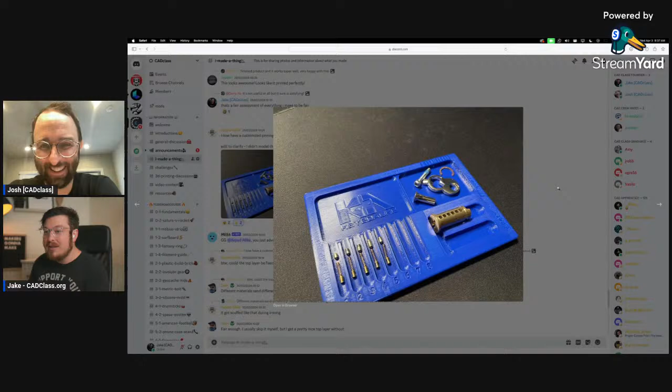But one thing I want to talk about is keyed alike. What you were saying a bit later is, can I fix the top layer with some fine sandpaper? That started a bit of discussion I want to expand on - yes, technically you can sand any 3D print, it's obviously soft plastic, but should you?

There's one thought that if you sand it, it becomes smooth - you can hide the layer lines and it becomes a nice, neat bit of plastic. But as soon as you rough up the surface, it turns very white or pale, giving a horrible contrast. Because plastic isn't very hard, it will never become perfectly smooth with sandpaper. You need to apply a harder material like Bondo, car sealant, or automotive spray paint that becomes harder than the plastic, and then you can polish it.

But I think there's a different thought, and I want to hear your opinion on this, Josh - you shouldn't sand it just to make it look pretty. You should accept the limitations and the surface quality of what you can get from 3D printing, and that just becomes an accepted quality.

Obviously as the tech gets better, quality improves slowly but surely. But as you can see in this picture, this is a really nice print - the top layer is lovely. I don't see anything wrong with this from a 3D printing perspective. Someone from woodworking or metalworking might look at it and say, oh, that's rough, you can see all the lines. I disagree. What do you think, Josh? Yay or nay on the sand?

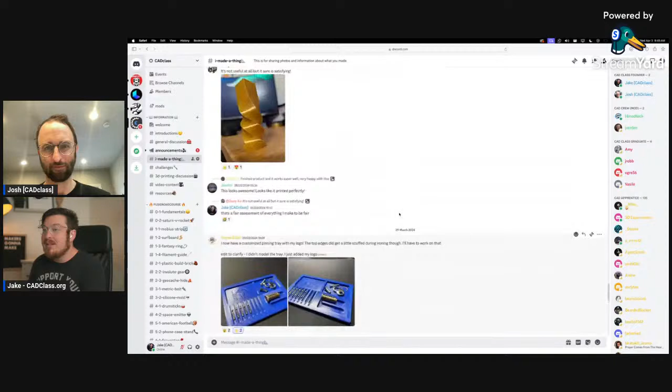Something from Eloreth - I can't remember if we went over this last week. But this is one of Joe Street's friends. He's just making a dead simple little headphone holder that snaps onto the side of their desk and just kind of holds their mouthpiece.

That's rad. One thing I will say, if we have just a little bit of criticism - I think I can see the layer lines are actually horizontal in this orientation, which means this large plate only has a tiny amount of surface area where it meets this big place. So if you're wanting to put your headphones on there and pull too hard, it's very likely you could have broken that off.

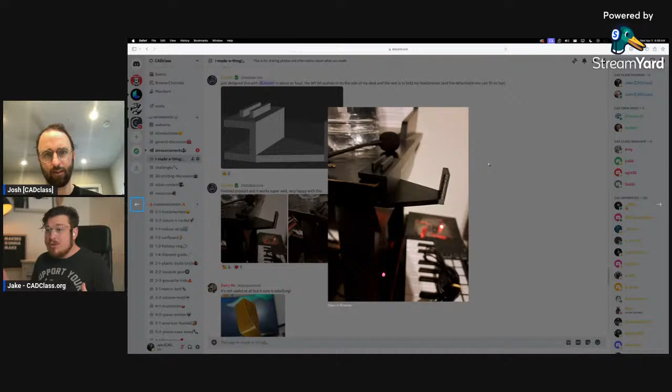So what I would actually recommend would be to print this sideways, so this angled face is actually touching the build plate and it's growing up at an angle. That means the layer line starts from this face and is connected in an L shape all the way around, making it just that little bit stronger. I imagine you won't have any of the support material you'd need for this undersection then. But that's pretty minor - rad project, love to see it.

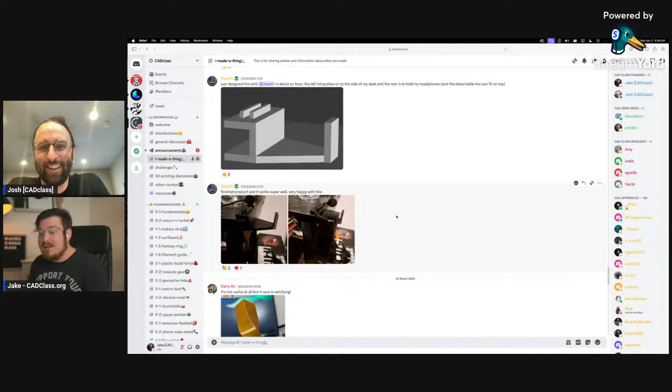Not very useful, but very satisfying. I totally agree. This is going to be one of the things I'm going to try and make today in CAD to see if I can actually make anything better.

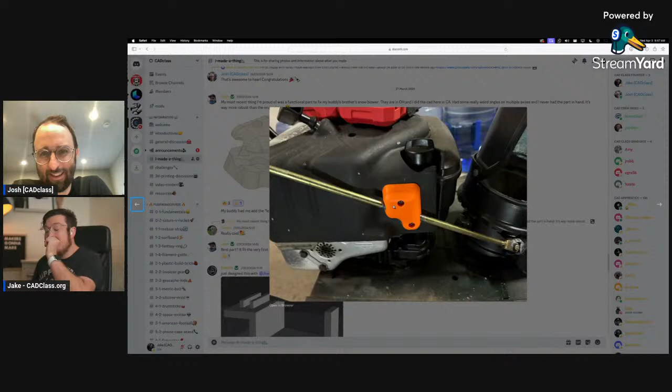And then Dom - I really liked this project. One of the most recent things I'm proud of was a functional part to fix my buddy's brother's snowblower. Had some really weird angles, and it fit the first time. So it looks like a little holder for a snowblower, and it just kind of snaps into place and screws in, and it's rad.

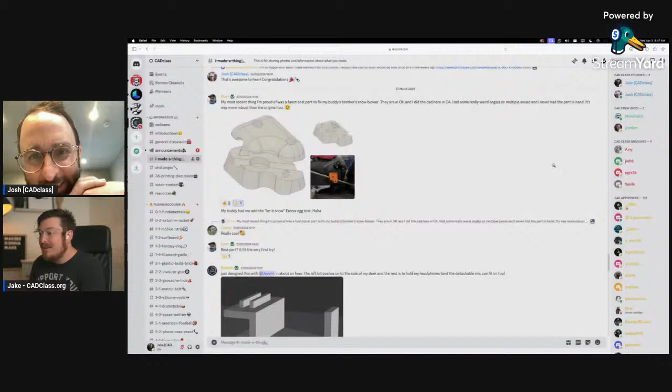I love that stuff, that's actually a fairly complex little design there. I know, that's not simple. No, and that's awesome, nice. Yeah, and it has little keys in it as well. Fantastic.

All right Josh, I want to actually get into this door handle thing because it's been bugging me for a while, and I just kind of want to get into it.

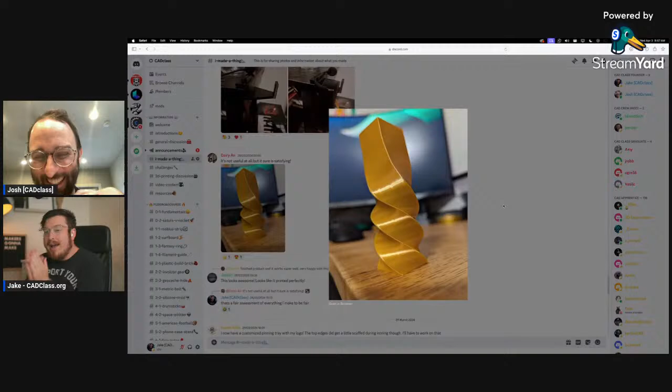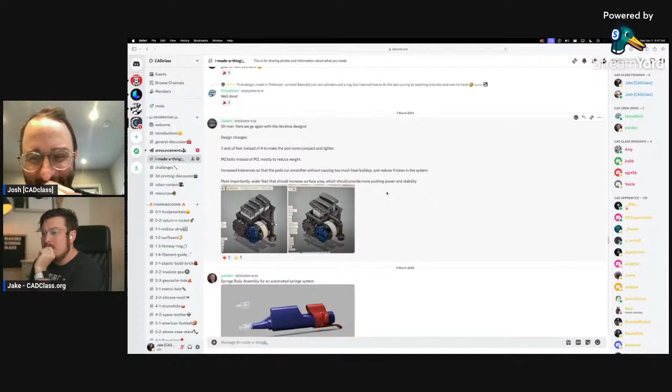Show the original photo of the door. Oh gosh, where is it? Yeah, it's up here. I actually can't remember who this was from. Was it from Dairy? It might have been. Yeah, I'm not quite sure, it was a long time ago. If we can find it... oh goodness, I don't even know if I can find it. But the idea is that it is, or it might have been, in the 3D printing discussion. Oh, I don't know, I have no idea. I'll also look, go and check it out.

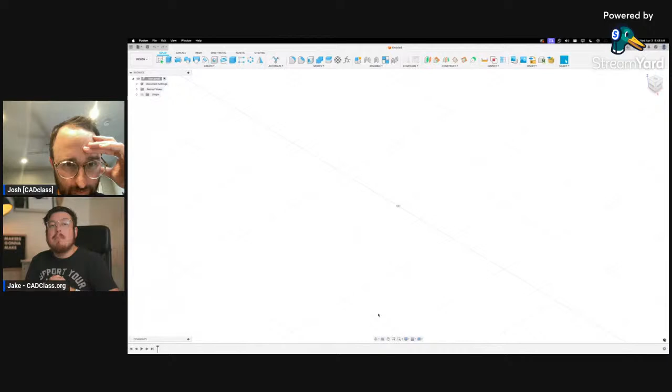The idea is that you have essentially a handle connected to, or handle in an arc, that has a twisted section in the middle with a square profile all the way through, and it is a perfectly normal square arc on either end. It's in the challenge section. There it is.

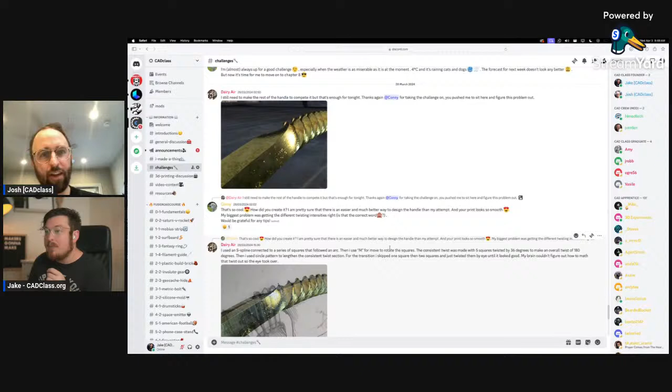I think, was it Conny or Dairy Air? No, Dairy Air did originally post it. Yeah, so Dairy Air on 3/20/2024. So that's the door handle.

So this is the original. I think one of the problems they were trying to solve is this little section right here, where it transitions from a square into a smaller arc. This would be a lot of many rotations, then a smaller arc, then it kind of transitions into a square. We kind of wanted to ease that off a little bit.

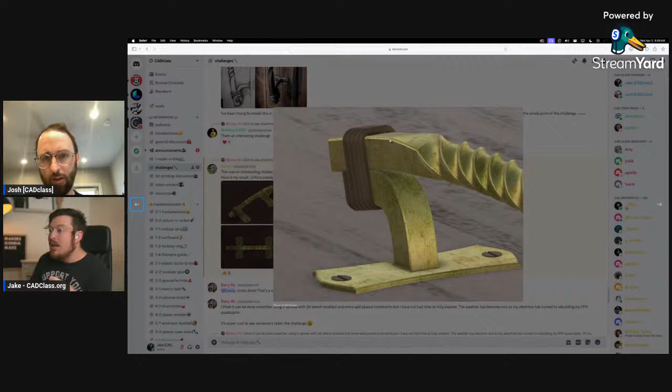What I'm thinking is that we can just merge many squares in between it and do ever so slight rotations all the way through, and I think that may work, but I don't know. So let's try it out.

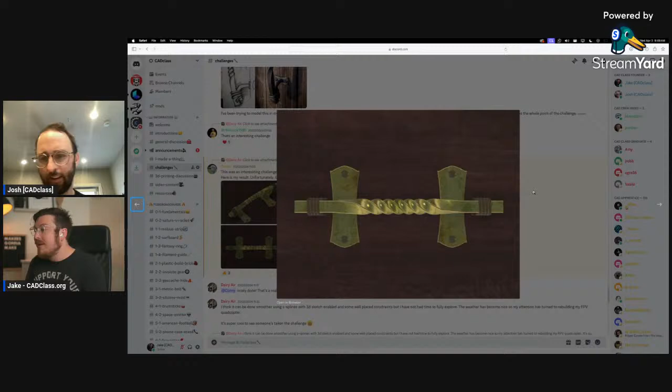So I'm going to start off in Fusion as always. I'm going to be starting off actually with the actual arc that I'm working with. This is just going to be a pretty normal 3-point arc, and we're going to be breaking it up into a few different ways. I'm just going to make the center point exactly below the origin, just to make life a little bit easier.

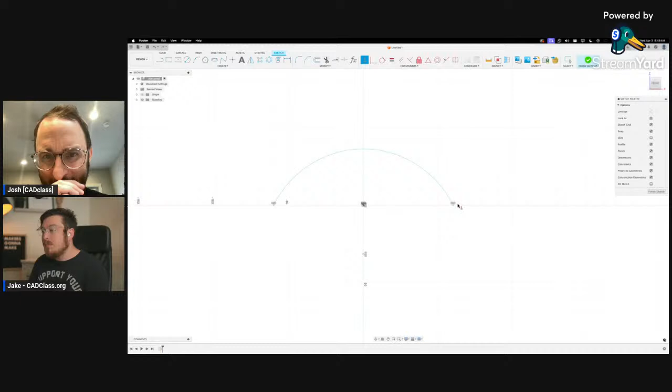Make those both the same on either side. There's actually no need to add really complex dimensions, but I'm just going to use some numbers that are pretty easy to work with, so I'm not trying to make life too hard for me. 25, yeah, that sounds about right. So the idea is that you had a really sharp coil in between both ends.

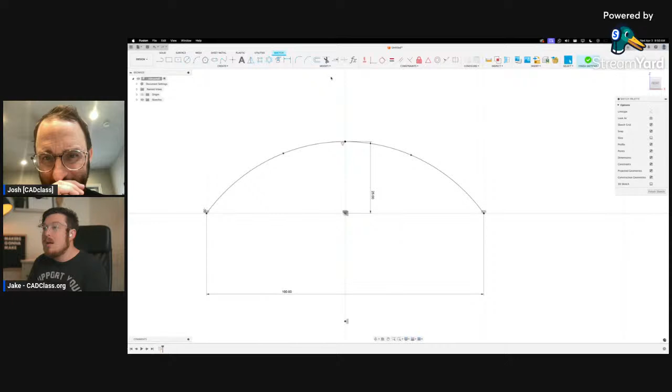So I'm just going to put some points on either side, and I can make them symmetric by either using the symmetry tool, or I can just make them horizontally constrained to each other, so as soon as I move one, then the other moves along with it. This is going to be the section for the sharp corners, or the sharp coils all the way through, and it should start off square on this end and then coil to the middle. Obviously, because this is a rotational part, I can actually copy one end to the other, but it's going to be this middle section that'll be a little tricky.

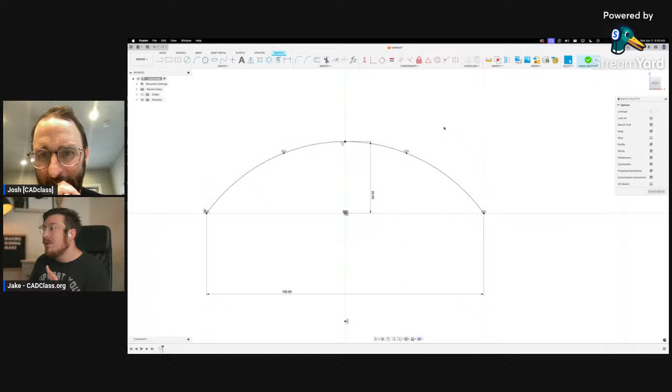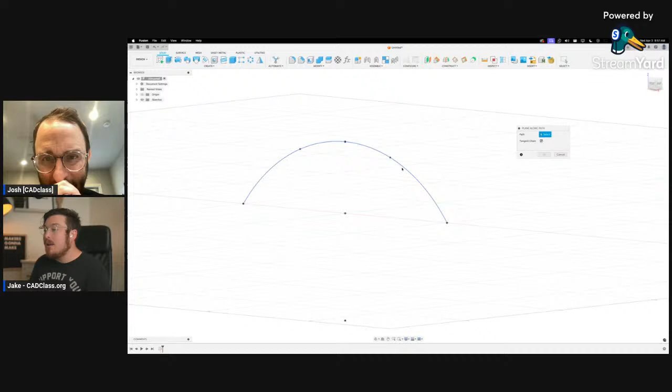One thing that's also going to be fairly interesting to do is to actually get a plane that is tangent to this arc, which is not super duper easy because you don't really know what tangent angle this is coming in at the bottom. But the main way to do it would be to go into Construct and then click Plane Along Path. That way I can just click on the path that I'm working on, and it works very similar to sweep.

If there's any points on this arc, it's actually going to recognize it as a point of interest, so it'll snap to that location. So I can't go any further than that point. It's at 100%, so I can just click OK. So this is the point that is totally perpendicular to this point of the arc, and that's where I can draw my square.

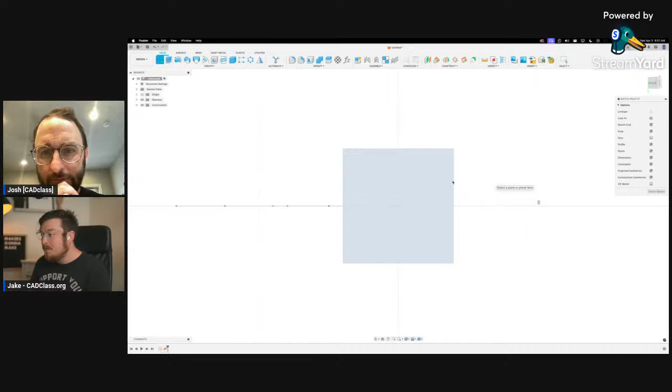I'm going to make it a center rectangle, and we'll call it 10 millimeters, that'll be all right. So the main idea with this is that we can sweep this profile along that path, and it gives us a square handle.

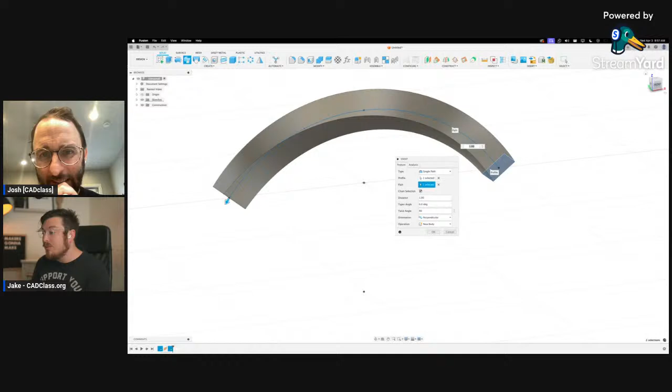That's pretty normal, but the cool thing is that we can come in there with our twist angle and we can actually change this up. So if I go 90 degrees, then it's got a quarter rotation. If I do 360, then it's got a full rotation.

So you can kind of see where I'm coming from, but it will always end and begin at perfectly straight squares. It doesn't lean at all unless I change this to something like 350, where it's not a perfect angle. That square is now off angle about 10 degrees. So what I'm going to try to do is actually taper that angle along the way.

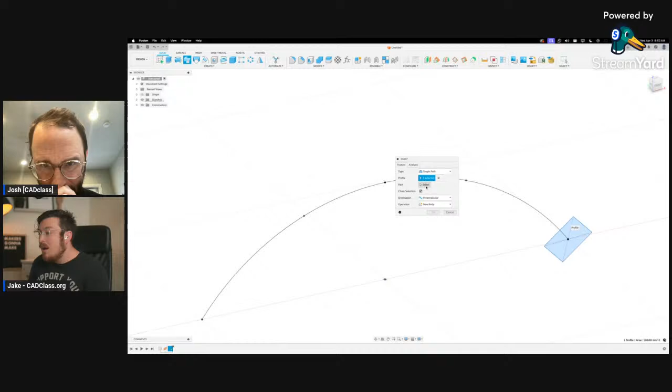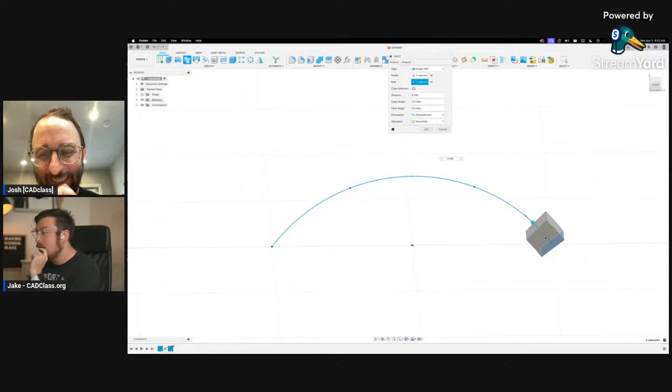So if I go back into sweep, I might be able to start and end it at certain points. I'm going to try and end it at these noticeable points, but I don't know if it's going to work. I've got no idea. I don't actually want chain selection, so that it will snap to those points, will it? Oh no, because they're not defined. Ah, gotcha. Okay, so I'm able to work it from there, but I'm not able to snap it on.

That means I need to define these two points and then redraw that square on that line. That's fine. So let's say the curved section wanted to be 40 millimeters. Let's make it 50, let's go crazy. This is insane, yeah, calm down.

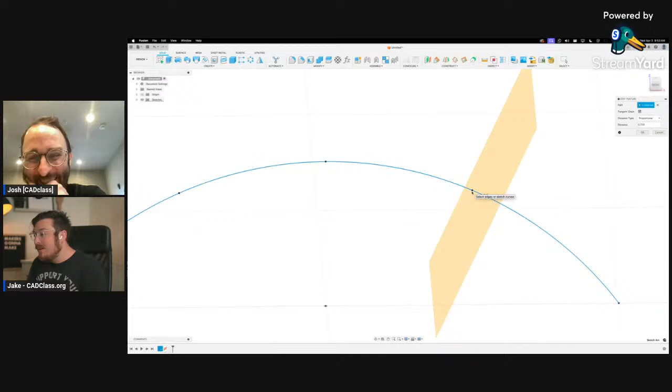Whoa, okay. Is it actually snapping on that point if I uncheck tangent chain? No, it's not. Interesting, okay. So will it snap to the middle though? It will snap to the middle, but not to the edge. Interesting, so I don't know how far.

So just so everyone knows, the distance is currently 0.727. That's a decimal percentage of the arc length. If I go all the way to the beginning, that goes to 0. If I go all the way to the end, it's 1. Obviously, the snapping point in the middle is set to 50 because it's halfway through it. But it isn't snapping to these points.

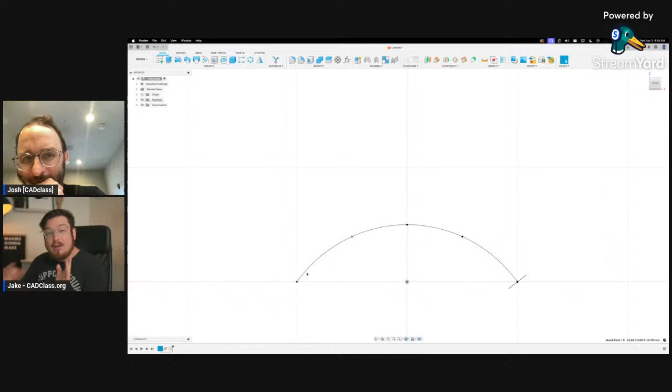Now I could figure this out mathematically, but then I would have to know the diameter, the radius, and the angle selection of this. That's a lot of work. And annoyingly, you can't actually do arc length dimensions in Fusion. I don't know why, but it's incredibly annoying. So I'm just going to assume it's what, 0.75? 0.7? That's close enough, that's fine.

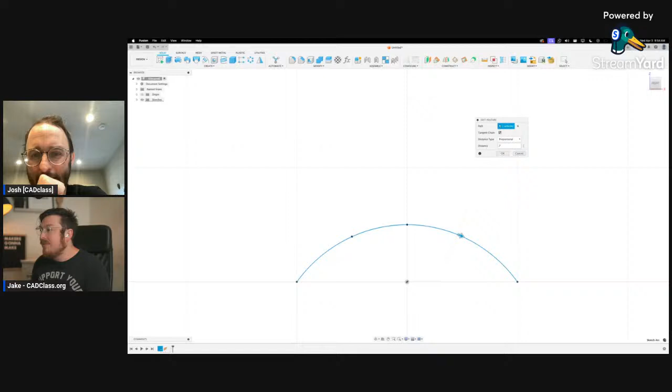So we'll see if we can sweep just that section. But like I said, I have no idea what I'm doing. I really don't.

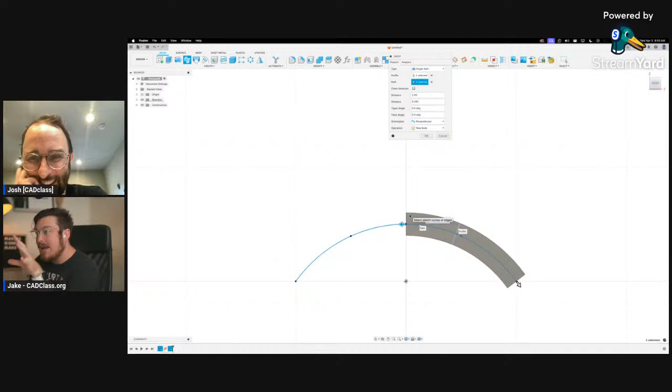So it's a little bit before then. Let's say 50. Well, actually no, because I could just go to that middle snapping point. Oh, it's not even snapping there. Interesting, oh, because it isn't the central point of that. Funky, okay. So I could snap, make it exactly down the middle, and then do a mirror across that face. But because I don't know where that starting point is, okay, alright, I'm figuring it out as we go along.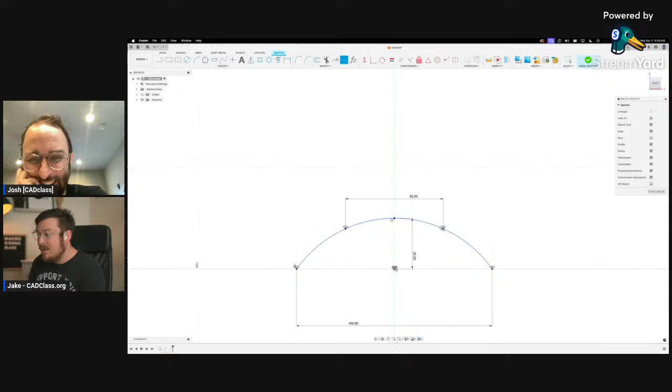I actually want to do a break in this. I want to snip this arc, so then these endpoints are actually... Oh, is it letting me do that? It isn't letting me cut it. Funky, funky, funky.

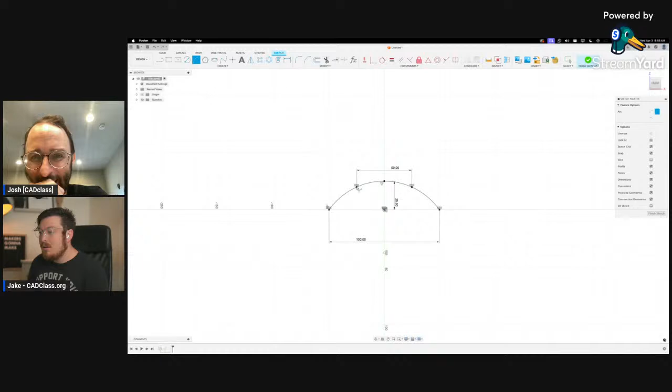Why did that just get deleted? Yeah, I'd like to break that please. It's not letting me break the curve at that point. That's very strange, okay. I'm going to fix down at that point and then make another arc there to that top point.

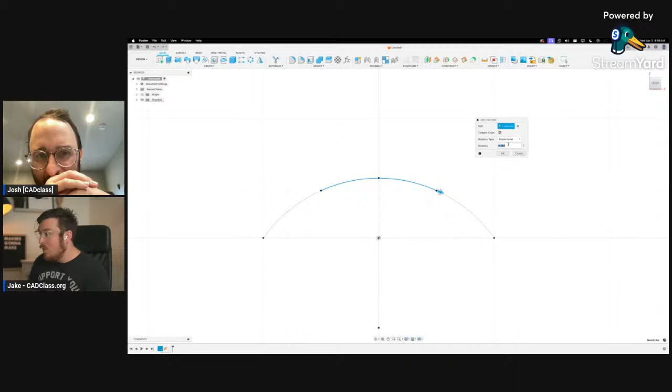And I'm going to be making the entire arc construction, so only this arc, or the fully defined arc, is the only one I actually care about. And then let's see if I can redefine that, so it's not the main arc, it is just that one. So it's going to be starting off at the, well let's just say the 1, so that's all the way at the end point.

Great, and then I would like to sweep it along that entire path. And as long as I have all the way along this one, there we go. And as long as I mess with my twist angle, as long as I make it in a series of 90-degree rotations because of the square, then I can choose anything I want.

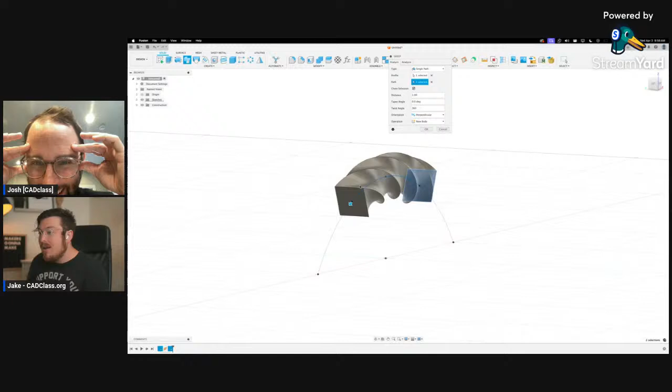So I go up to 720. Ooh gosh, what is it? I can't do any math right now. Let's just keep it 360.

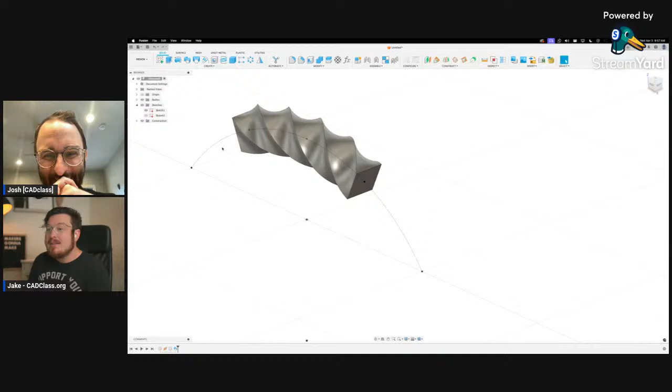That works for me. So my idea is that I can go back and then continue this arc more and more with less rotation. Hopefully if I can continue that twist per arc length and kind of taper it off slowly, then I should be able to get to a straight section somewhere around here. But I still don't know, I still don't know what I'm doing. So let's try this out again, I'm going to be making some more arcs from this section.

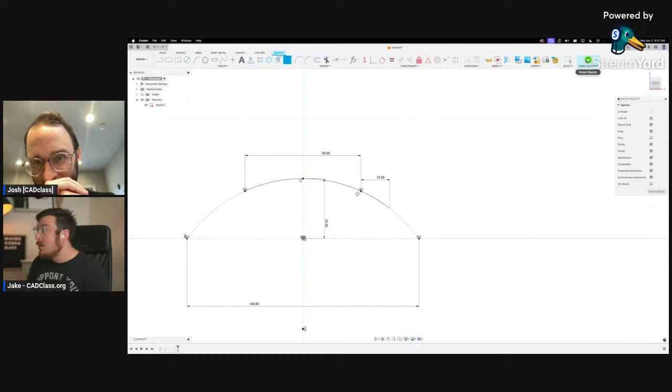I'll try a straight path and just try one in the middle. There we go. No idea how much, 12.5, sure. I'm making this up as I go along.

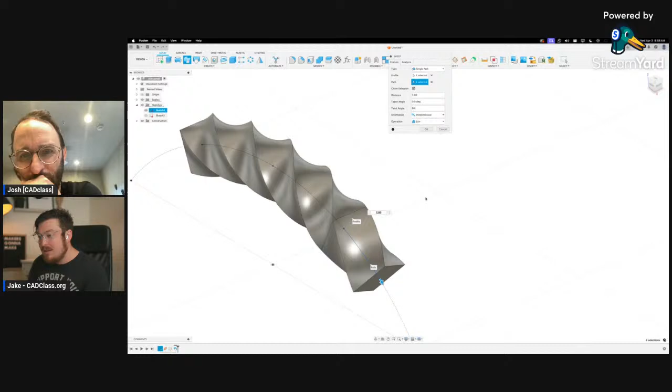Let's sweep that along this path, but let's give it 180. Okay, so even though this is a less twist angle, because it's over a shorter distance, it actually doesn't work all that well. So I need to go way lower, maybe 60. But even when I do that, I still get this funky angle.

Do you see that, Josh? Yeah, I kind of do, it's coming in and then going off. Yep, so I think probably the trick...

...is to then find an angle. Oh, it actually wants to be hiding that. Is to then find the angle that kind of gives you this illusion that this arc and this arc are actually tangent to each other.

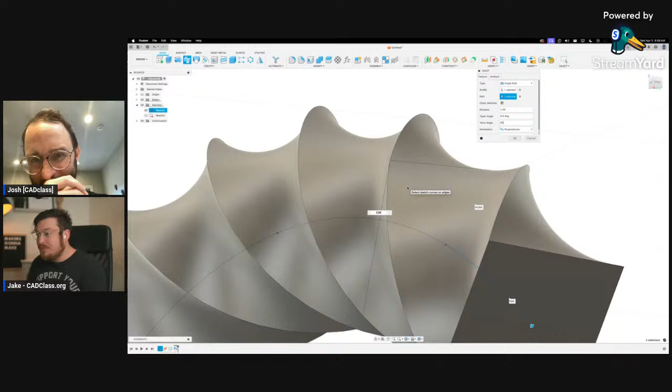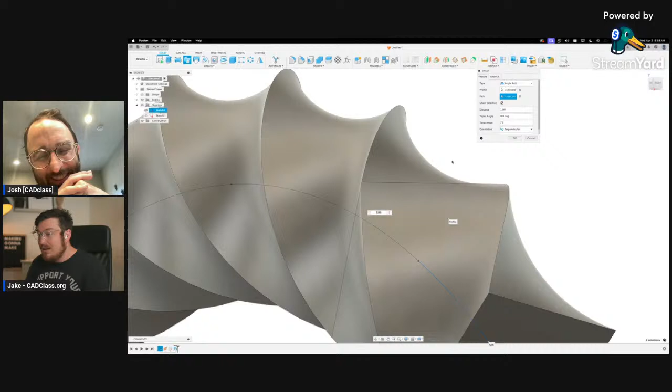It's pretty close, but isn't that just going to end up being the same arc? That would be the exact same thing. So you'd actually have to split this up with many, many, many slight variations. If you did 80, that's still pretty close. So I imagine you'd want to do basically 5-degree, maybe 10-degree offsets until you get a slower and slower rotation. And I think this twist angle is the key.

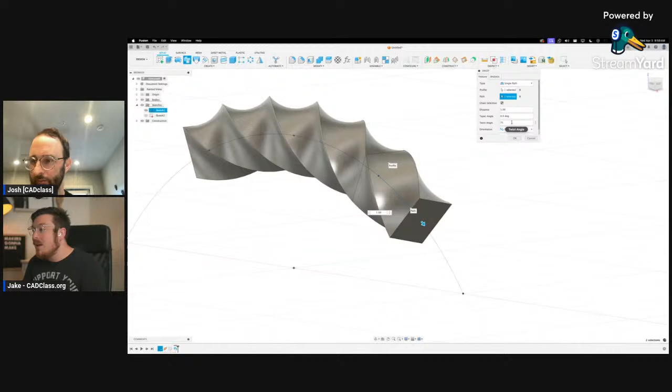As long as you have this arc length the exact same for all of the iterations as you go, less and less until it's just perfectly straight. And you reduce this twist angle - the amount you go down in each section is going to be varying exactly how smooth that transition is. If you go too aggressive, down to like 25, then it's a pretty obvious corner. And if you go 84, only 1 degree less, it's going to take you so many iterations that it's just a waste of your time, really.

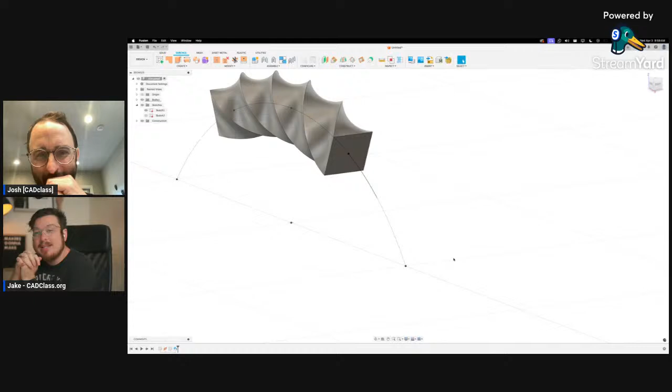So Derek said he used a T-spline as a guide rail for the sweep. A T-spline, interesting. So going in here, that's where you'd make a coil that essentially goes along there, and I suppose you could taper that. I haven't used T-splines in so long that I don't want to do anything stupid because I know I'm gonna send people down the wrong path. But I believe what Derek's talking about is using a series of splines so you can taper just a single corner, a single edge of this coil as it falls along that path, and the rotation per arc length actually gets reduced.

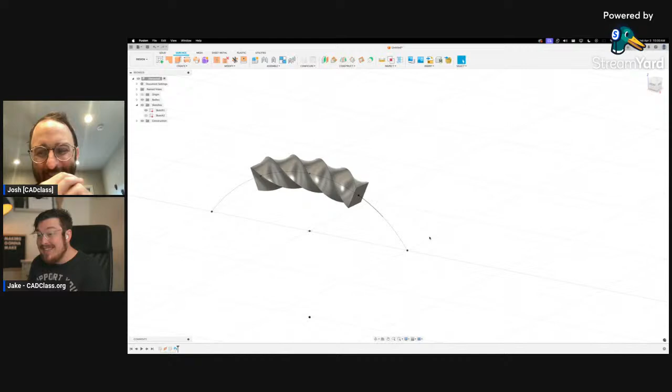And you should be able to configure that across the entire length of the arc. Derek, if you completed that, that's rad. That is so fantastic. But this would take me so long to do in real life that I don't want to waste anyone's time. But if you can figure it out with T-splines, that's awesome, that's fantastic. Hats off to you, man, because that's fantastic.

So Ethan from Maker Faire OC, who is ECS or EC Spot on the Discord - if you go to the general discussion, he's working on a truss system and put a Fusion file in there, and he wondered if we could figure out what happened. He said, I'm having a problem when I change base size from 8 to 10 inches, the model goes a bit wonky. He's sure he missed something. Can we have a look at it?

What page is it on? It's in the general discussion. If you scroll up just slightly, there's a 2x2 truss system Fusion file - there we go. I'll get that downloaded and pulled into Fusion. One thing to know with Fusion files, it's rad, but for some reason it takes so long to not upload, but just to open. So I'll get this going in the background.

While I'm doing this, Josh, I want to give you a little starter of a rant, and then I want you to take it over, okay? Is 4-axis 3D printing overrated or underrated? Go. 4-axis, so you're talking about the rotational, basically like a lathe in the middle that spins, or the head of the printer that moves?

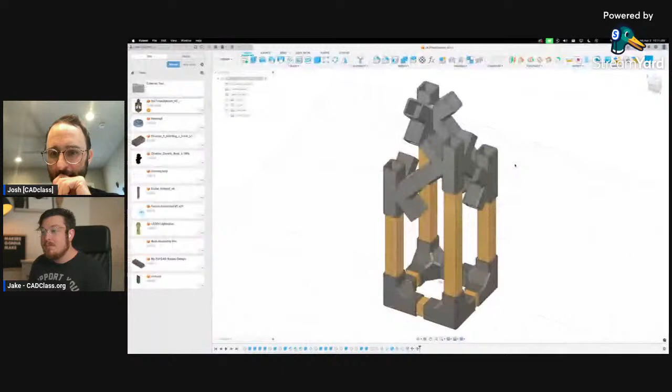Oh, really quick, before we get onto that, we wanted to go over this model. Who did you say it was by? Completely forgot. That was Ethan, oh yeah. So he was saying he made this truss system, 2x2 truss, but then when it came down to changing parameters, things got a little funky.

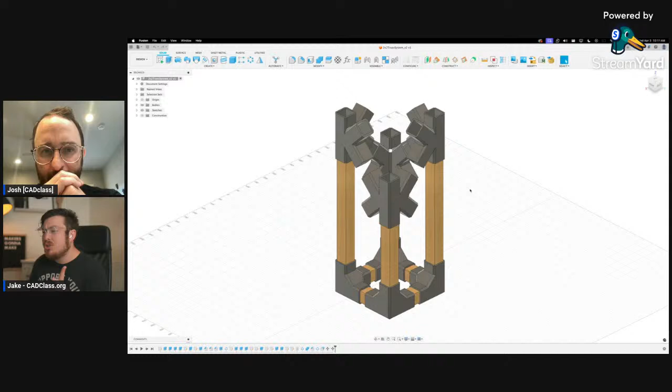Yeah, he said, I'm having the problem when I change the base size from 8 to 10 inches, the model goes a bit wonky. Okay, so I'm going to go into my parameters. Base size is currently set to 8, so let's change this to 10 and see what the problem is.

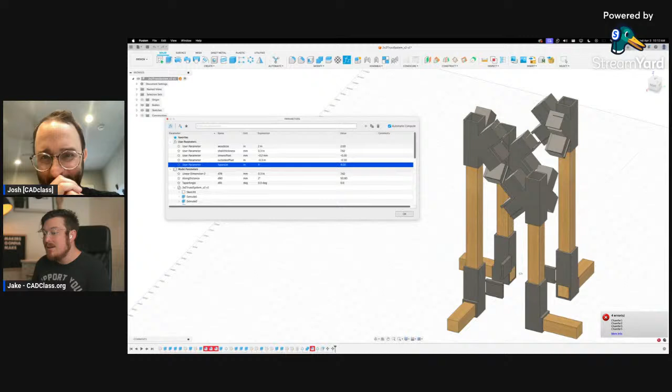Yeah, I would say so, something is off. When I do that, it's actually highlighting 3 different chamfers down here in red - that might be the problem. But let's creep up on it. Let's see, 9 gives us the same error. 8.5 works, so there is a dimensional limit. Something's going on there. So as I creep up onto it, I go back down to 8.5.

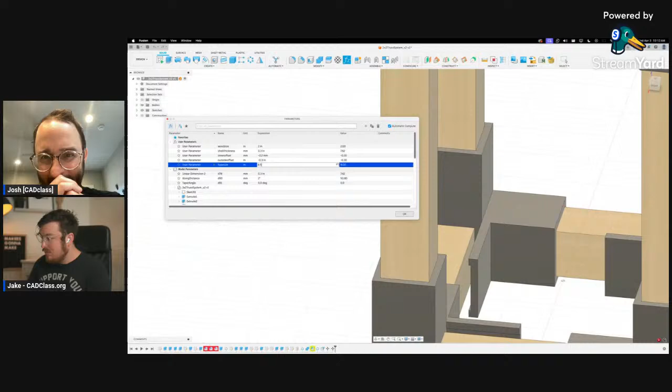Okay, so I believe it has something to do with your chamfers—they're not grooving, they're not working with everything. And it looks like, oh, these are all just bodies. Okay, so this is immediately, I know what's going on.

Ethan, this is a project that should have been made with components and joints, not with bodies. This is a really fantastic illustration of the difference. When you have a project that has just one object, just one body, it's really easy. You've got this top file here with the white cube, which is your component—this is like your big folder.

Inside it contains the 3D object—that's the body—but it also contains the sketches, the 2D sketches, and then any construction material. So the component is kind of like the container; it houses all the information.

A lot of people get confused between the component and the 3D body because they're like, well, it's the same thing, right? Imagine stepping into a house and not having any of the blueprints and trying to remake it, versus stepping into a house where they already have the instructions and the blueprints in front of you. Which one is going to be easier to recreate? It's going to be the one where I have the instructions.

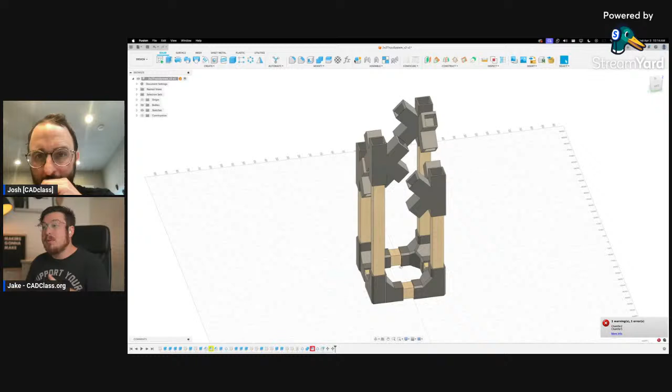And that's where it has all these sketches. So as you go through, this should have been made by instead of having just one component, making multiple components inside of this and then using the joints to actually assemble all of this.

So what's happening with the change parameters—if I set this to 8 inches, everything is groovy. What I want you to notice is that this square opening is exactly offset from this outer square, so all of these walls have the exact same thickness to it, which is great.

But as soon as I change my parameter from 8 to increase that to like 8.5, you can see it all goes out of whack. Now this inner square is actually translated a little bit, and now it has different thicknesses all the way through, and some of my chamfers have actually disappeared.

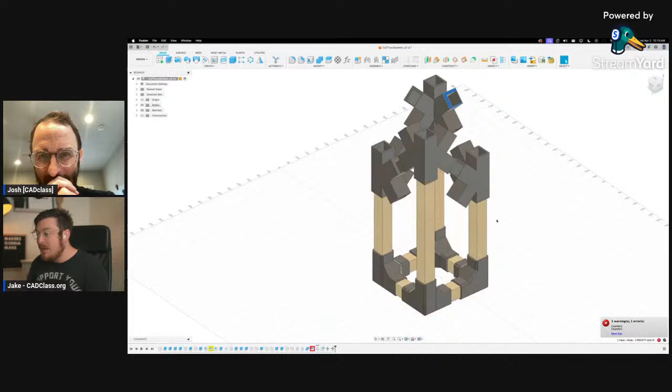And that's just on the top section. If I go down here, you can actually see the wall gets incredibly thin there. This block—or this wooden arm—is actually passing through the plastic part there.

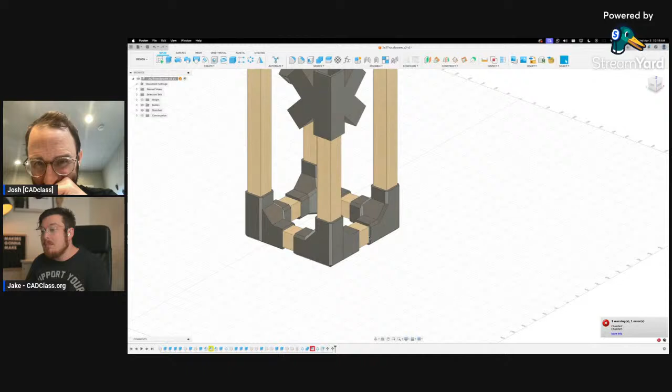If you were to make this with different components and joints, then when you change the length of the wooden cross members, because this wooden part is just joined to this component, they have nothing in relationship. When I change this part, it doesn't affect that part.

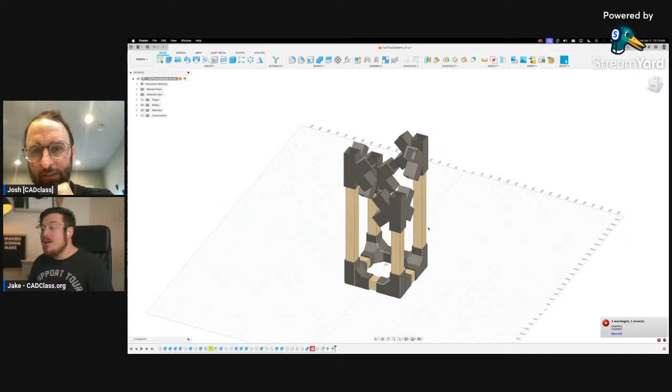So you actually want to start basically from scratch using these dimensions, and make sure this is just a top assembly, and you make a brand new component for each of these parts instead of bodies.

That's the idea, Ethan. If you want a little bit more information about joints and assemblies, that would be chapter 6 and 7 in the book—that's where we go over the difference between bodies and components. Yeah, that is a really cool project, but that's where you're going to be going wrong.

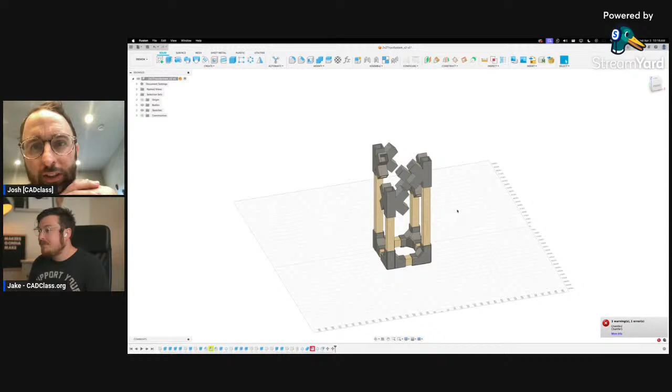So I think with the bolt, let's go ahead and just make a bolt with unchecking full length thread, instead of going back to the original way that we did the bolt. If you want to do the bolt the way that we did it, that's chapter 3. I'm just going to do one incredibly quickly.

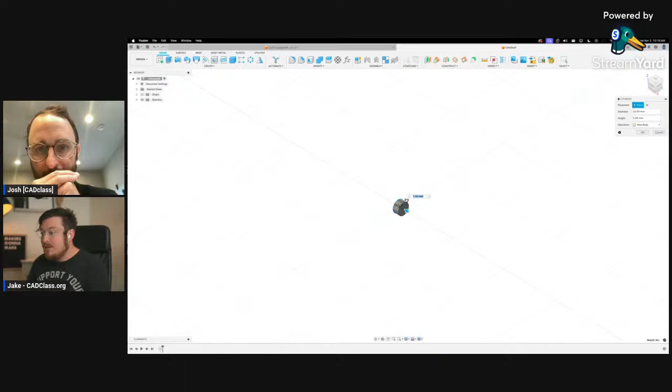Okay, so I'm just going to make literally a threaded rod—I'll make this 10 millimeters by 50, that's fine. And then I can add on a thread to this—I'll make it modeled. This is what an M10 thread looks like.

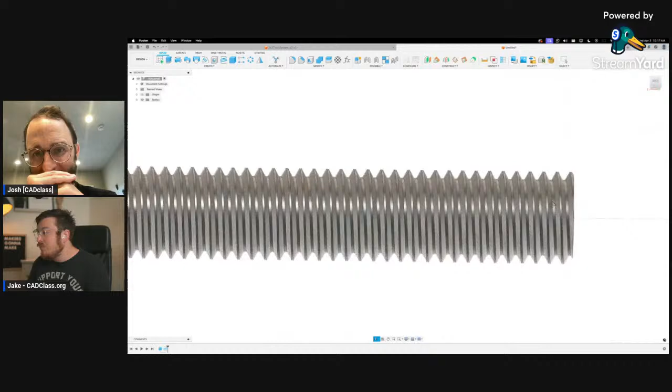One thing I want you to notice is that as the thread spirals around the cylinder, it gets closer and closer to this top surface until it reaches an incredibly sharp corner right there. That's where the thread ends, and then it has to recede into the beginning of the thread. This is really hard to screw into.

So one thing we can do is make a sketch on that front section—we can make a very simple equal-sided triangle. Whoops, totally screwed that one up. Because this is an equal right angle triangle, we know this is at 45 degrees, so I'm just going to make this something like 4 millimeters.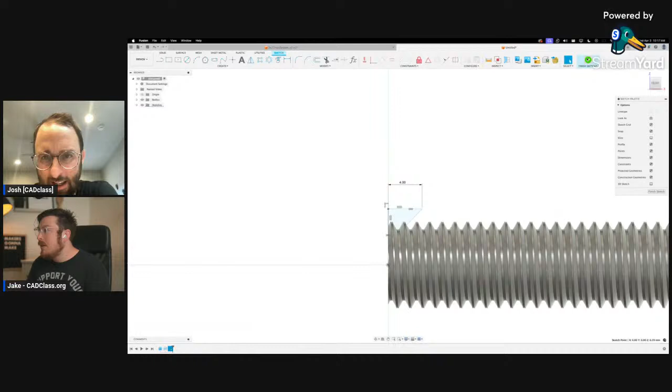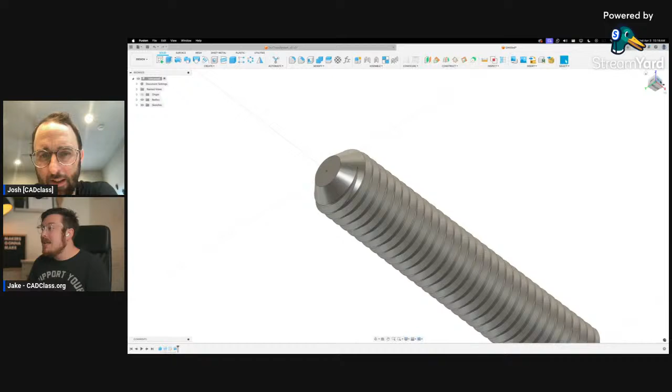Then I can lower this down and actually do a revolve cut of this triangle about the z-axis, and it will cut away this outer edge. It will leave me with the beginning of the thread that is now inside a chamfer, which makes it significantly easier to actually screw it in, especially when you're 3D printing this.

Obviously, you wouldn't make one of these from scratch, you could just buy a bolt. But this is one of the ways to do it. The other way would be to actually just make a cylinder, and then add on a chamfer beforehand. So if I make this again, 10 by 50.

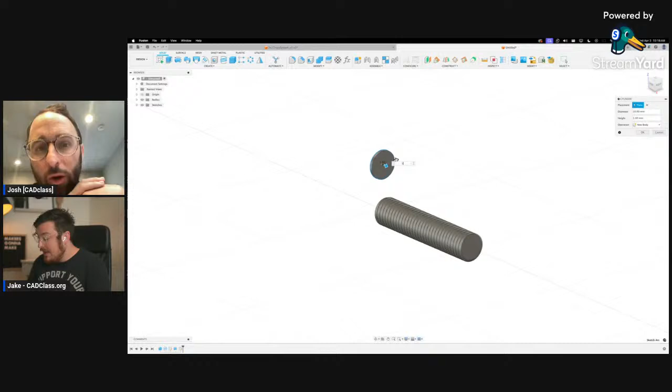This is not the YouTube version yet. This is a different one, not yet. This is another way, okay.

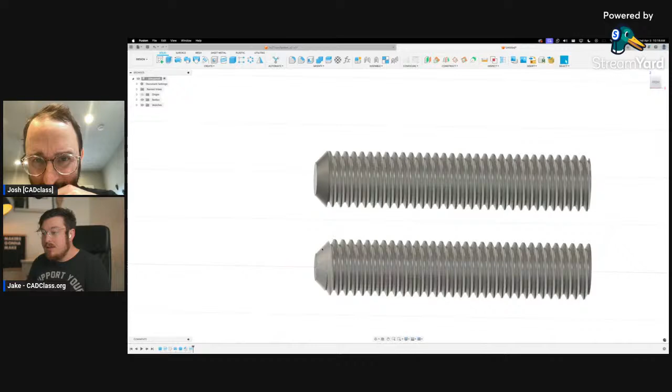So the other way people go is, can I just add on a chamfer? We'll call it a 2 millimeter chamfer, and then add a thread to this back section. What you'll notice is there's now no beginning to the thread on the chamfer - it actually ends behind this lip. It's like taking a thread and welding a big block of metal to the outside of it. It won't allow you to actually screw into it.

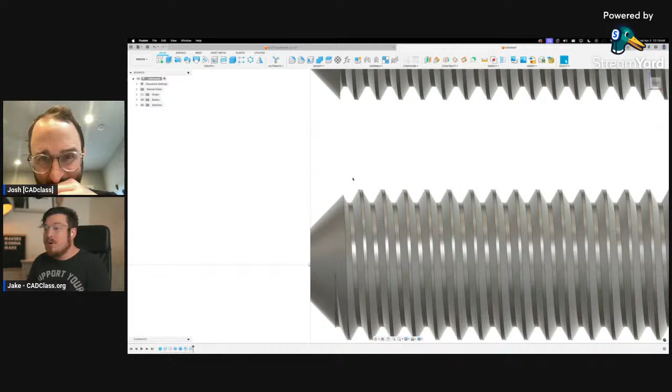So it's really important that we cut away some of that material. You can see the top of this chamfer is on the same level as the thread, whereas in the other version, it's actually below the outer section of the thread. So it does allow you to slowly increase it.

But Josh, what was this guy on YouTube saying? The final one was to uncheck full length for the thread and then add a chamfer. Let me see if I can find the comment and read it specifically.

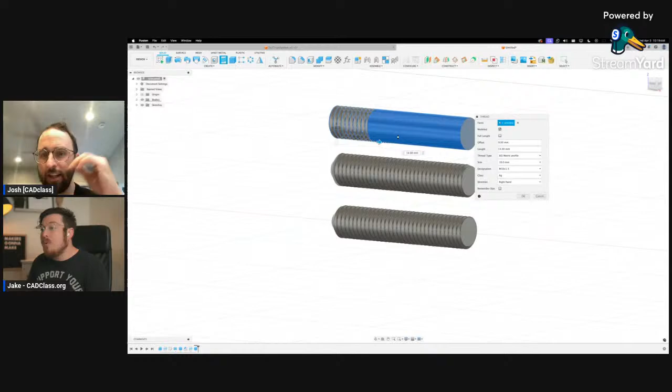So one thing you can do is uncheck full length, and then you can maneuver it. The guy says it's much easier to uncheck full length on the threads and leave 0.5 millimeter at each end. You can then use the chamfer tool. So try that, see what that does.

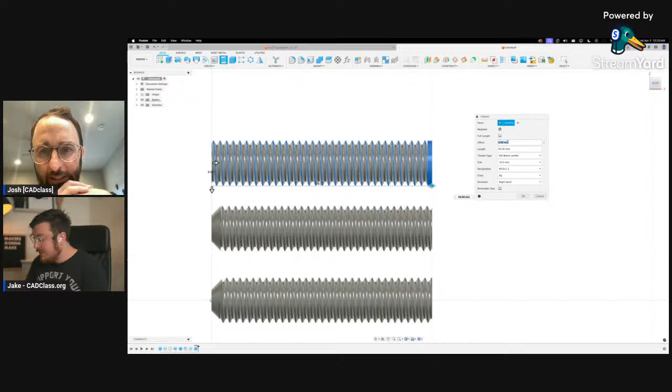Okay, so because he wants to leave 0.5 millimeter at either end, and this is a 50 millimeter long part, I'm going to make it 49 millimeters total, then offset it 0.5 millimeters. So then I've got flat sections on either side, and then add a chamfer onto it.

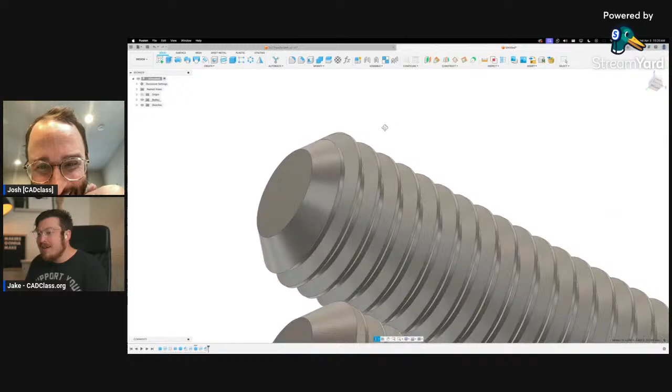So that is, in fact, leaving us with a chamfer. That's pretty good. Not bad. So what I am noticing, there's a weird corner. I don't know if you guys can see it right there. Yeah, I do see it. That's funky, interesting.

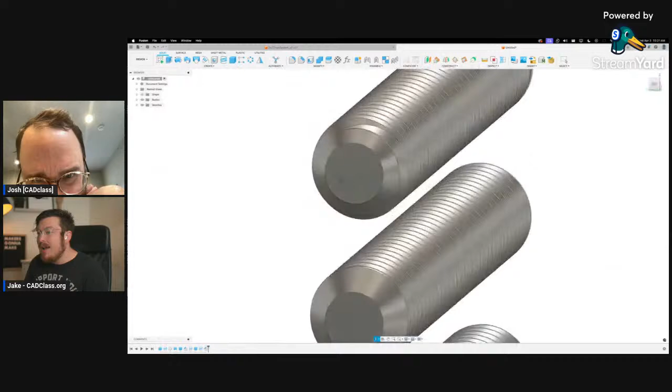It's cutting into it though. Wow, yeah, it is removing material, which is what you want. Fascinating. Okay, I actually want to 3D print all of these and see if this works in real life.

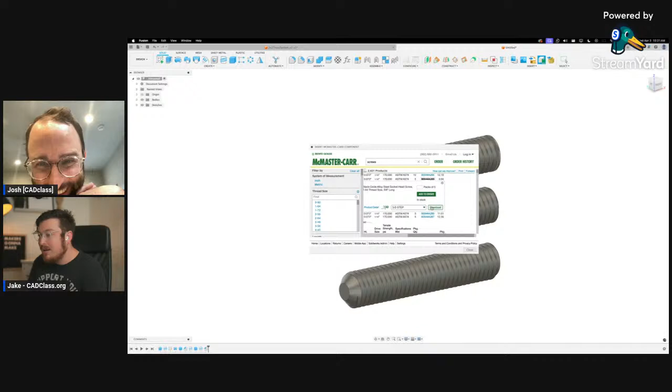Obviously, when you actually pull in a bolt, like if you go into Insert McMaster Carr and pick any bolt you want - fully threaded, any of these, groovy, 3D step - bring it in, download. God, there's so many parts on McMaster Carr, it's amazing.

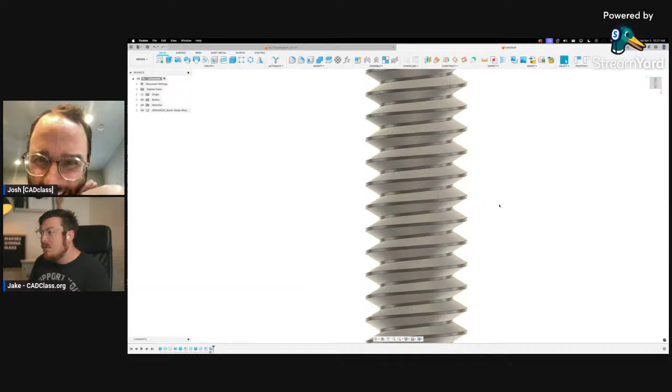All right, and then we pull this upwards. So this does have a little bit of a chamfer on it, but it looks like the thread is actually being pulled in a little bit. Is it chamfered? It is not, oh, yeah, is not chamfered.

No, no, it's not. It's ending in a coil thread. Right.

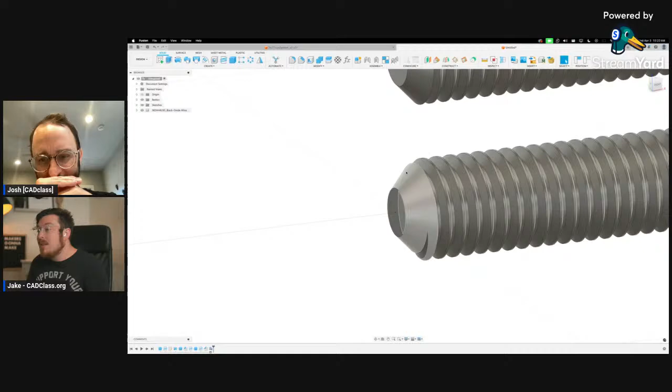Funky. So the idea with the triangle revolve method is that it's kind of like you are cutting a thread on the lathe, and then holding a file at a 45-degree angle and touching off that outer corner. Because you're filing afterwards, this angled section is actually cutting into the thread a little bit.

But this is actually a different type. Really funky. See if I can expand that, show all the different sketches in it. No, it doesn't, that's annoying. So that must be a coil thread mechanism.

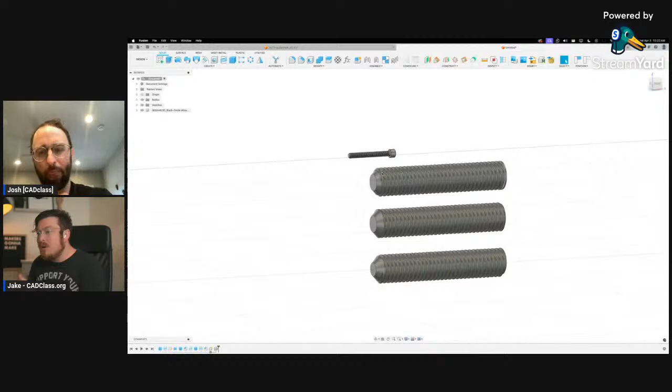Fascinating. All right, so yeah, I'd be really interested in actually 3D printing this one and seeing if it works as well as the normal revolution cut. Because if it does, that's going to save a huge amount of time. Yeah, that's a much easier solution if that works. Way easier. Yeah, all right, that's not bad.

All right, Josh, I think I'm all done for the week. That almost made it to an hour. Not bad. Yeah, no, I think that's fantastic. So we're just going to end it just a hair early today.